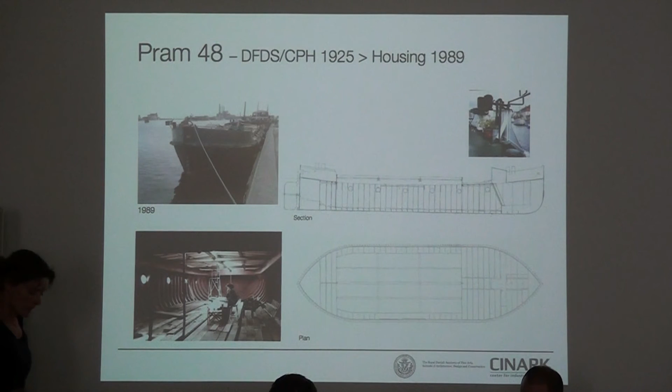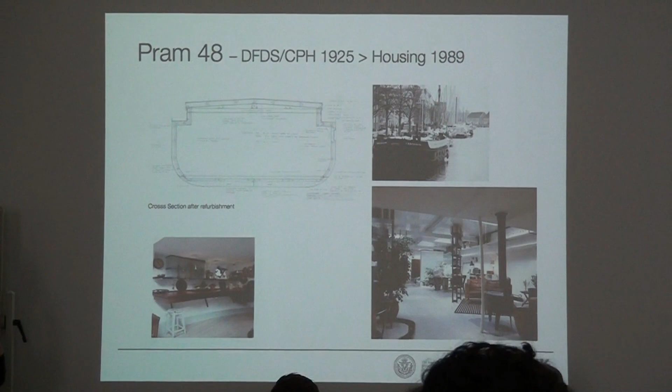This is what it looked like when we took it over, and this is what it looks like now. We live there with three children and a dog, and I'm five minutes from school—sometimes almost too close, in terms of getting off the island, as we usually say.

What's interesting about living like this is that the question of climate change is moving closer every year, with fall and winter storms, and seeing the sea level in Copenhagen's harbor actually rising to very critical levels. Being close to nature while in the center of the city is a great treat, but also a great daily challenge.

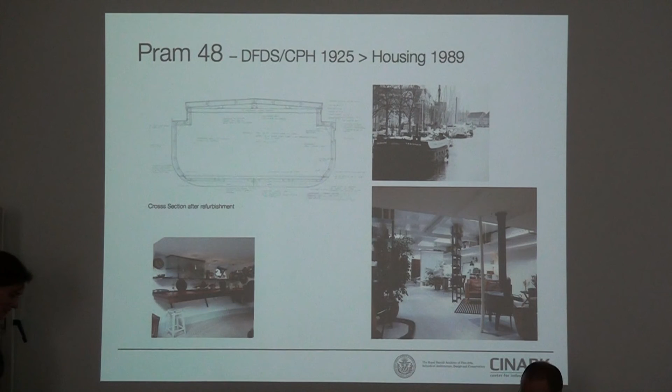This is the KADK, as it's called right now. If I had been here ten years ago, I would probably have called it something like RFDA—the Royal Danish Academy of Fine Arts, School of Architecture.

In 2014 we had a merger with the School of Design and School of Conservation, and became the KADK. We had a new dean, a new governance structure, a professional board, and we were moved from the Ministry of Culture to the Ministry of Education. All these things happened within a year.

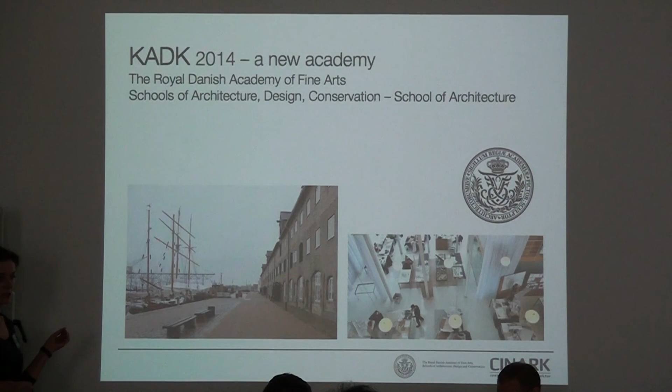It's a very old school—probably the second oldest architectural education in Europe, founded in 1754 by King Frederick V. Those of us who studied and graduated there carry this legacy of history with us. But at the same time it's also a very contemporary school, and it has certainly changed.

In 2014, we also changed the whole structure of the school. Before, we had institutes or departments, but now because we had these two new schools integrated, they wanted to make a couple of shared programs, not with conservation, because that's very special training, but across design and architecture. We have 2 architectural schools in Denmark, one in Copenhagen, one in Aarhus, and before the merger we had 2 schools of design. So now at this moment we have the KADK, which is a conglomerate of educations, a small university, and then the School of Architecture and the School of Design still.

What happened was that we got a number of new programs. Everyone had to bid in or propose programs both for bachelor's and candidate programs, and this whole landscape of new titles came up. I proposed one which talked about ecology, tectonics, and industrialized architecture. Someone else proposed something about urbanism, ecology, and planning, and then someone found out that the 2 of us should make a program together. So this was just to explain how this whole procedure or process was taken on.

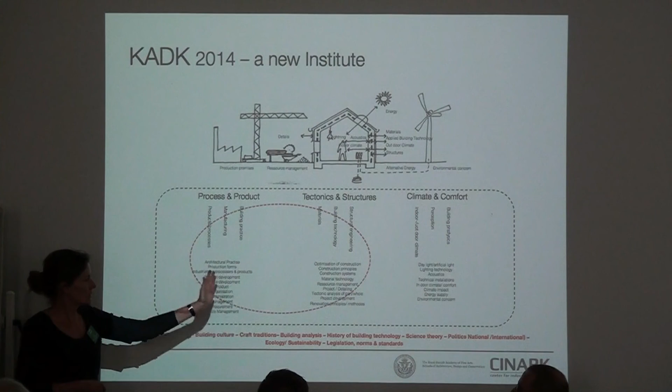But what happened as far as the topics, the climate and comfort people were taken out and moved into the design institute, which was to me a great puzzle. I don't think you can speak about constructions and architecture without talking about building physics, but all these things happened, and it still hasn't really found its proper form.

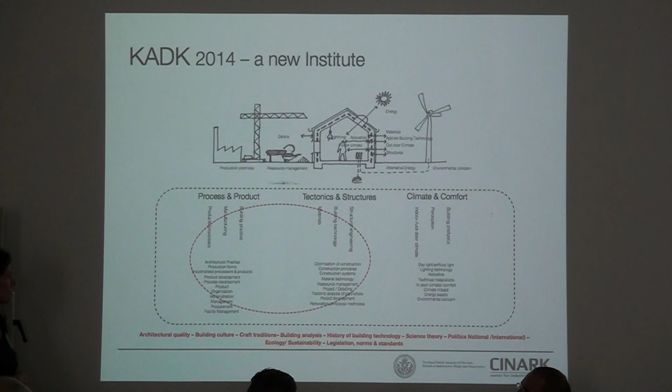But this just came up the week before last. What's happening at this moment is that we have, as you may know, a government mainly supported by the right-wing party in Denmark, and they have a very strict policy in terms of getting people into work, which is reasonable. But at the same time, they are looking at unemployment rates, and among the most unemployed are designers and architects. So we were actually subject to a budget cut of 38%, which was implemented the week before last.

It's 30% of the intake of students and 8% of the total budget. We were just called for a meeting where the dean told us how this was going to be executed, and it also affected the structure of the programs. So these things are happening just these weeks. While I've been sitting here, I've been getting emails saying things like, 'Now we're protesting, can you sign this protest letter?' All these things are happening in the background at this moment.

But at the same time, by putting us into this new managerial reform among the universities in Denmark, we don't have any democratic influence on the decision making at this moment, which is very frustrating from an academic point of view. But so far we survived, we survived this new cutdown. We're still out here, it says in Danish, but we still hold the title. But it says here we have to be developed further, so we are very curious about what that implies.

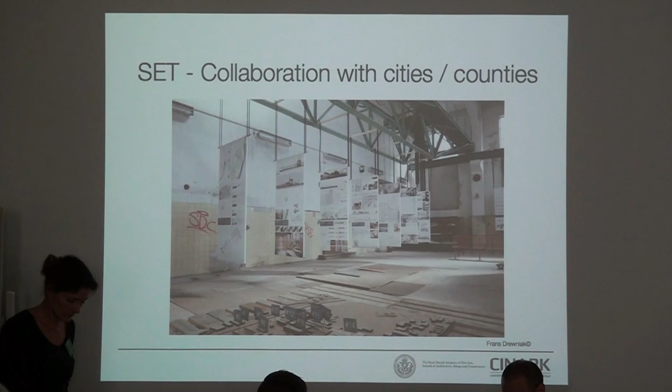But also, as for the program itself, we are collaborating with cities and counties, taking up problems or ideas or politics, trying to push forward and engage the student projects in these collaborations. This is from an exhibition we had last year in a large paper mill, a huge area in the city of Næstved that has closed down, an industrial area where the students worked within that context, and the projects were then exhibited in the mill. There was a whole group of people from the city hall and regular inhabitants of the city who participated.

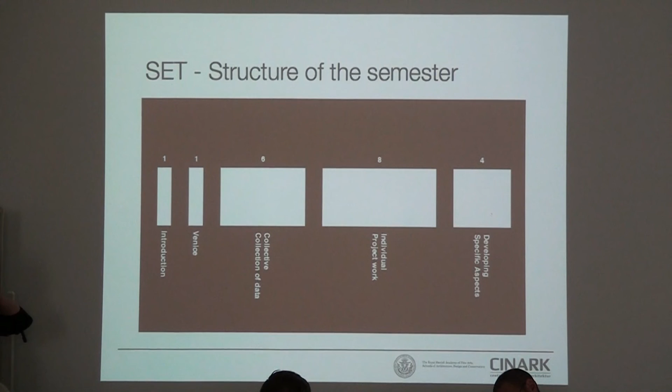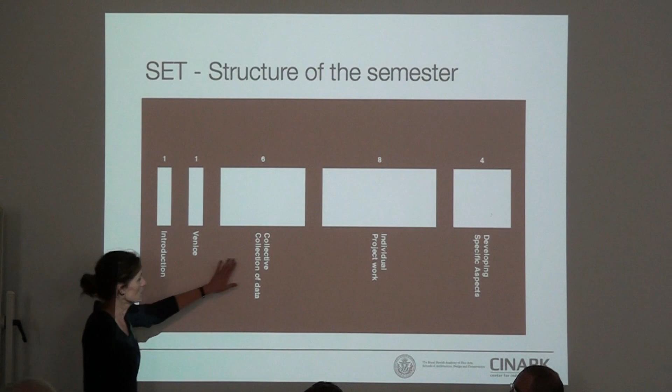This is just to show how the semester has been structured. It's very simple, but we usually have a portfolio week where everyone presents. We also go to Switzerland, but this year, the first year, we went to Venice. Then we have a huge bulk of collective data. We have the students make different sort of registrations, interviews, and whatnot, and then we have this pool of data which everyone can draw upon in their projects. Then they do their individual projects, and from that they take the last 4 weeks to take out a specific aspect they deal with in greater detail.

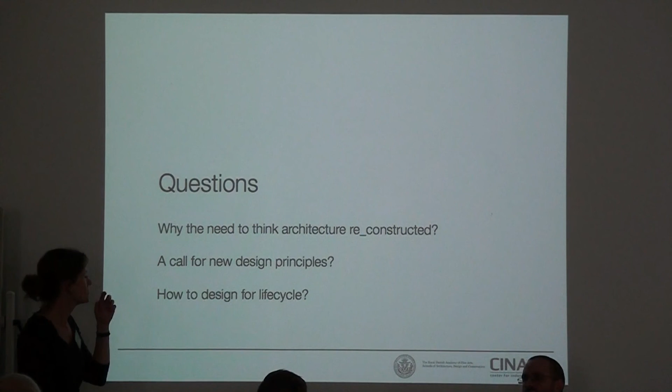As for the things I wanted to talk about, having listened to the other presentations, I think it's important that I situate the examples and the discussion on which we have built our program. These are the questions: why do we need to think architecture reconstructed? I'll try to frame the overall question, which will also summarize some of the points addressed in the former presentations. So this is the big picture of the environmental challenges in the building industry, and how this affects architecture and the education of architects.

And then this call for new design principles. I'll show an example from one of our PhD students, who is actually running an architectural office and also teaching in our program. Finally, some examples from the students on how to design for life cycle, showing how we teach the field of salvage, in this case building materials in construction, and life cycle scenarios in the architectural design phases.

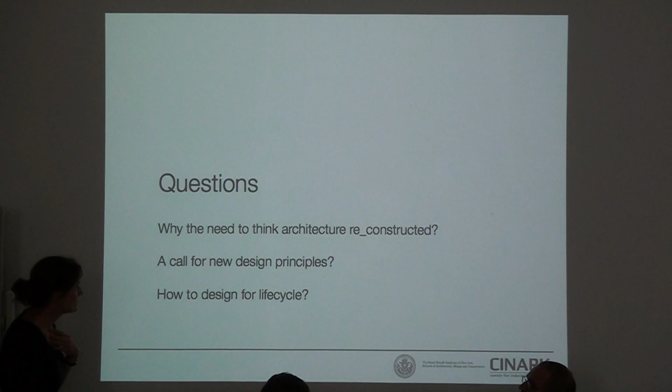I'd like to open with a statement addressing tectonic thinking, which is very much what I have been dealing with throughout my academic career, and also address in the teaching. Tectonic thinking is defined as a vital attention towards the nature, the properties, and the application of building materials and the structural principles of construction, and how this attention forms a creative force in building construction through architectural design, enabling us to identify, refine, and direct architectural strategies for sustainable building culture. So this is the basic idea.

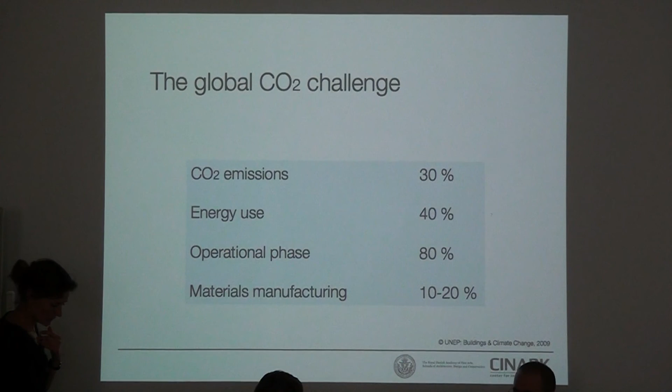This also points at the one-eyed insulation strategy, at least as we have seen it in Denmark. In Europe, the construction and operation of buildings are responsible for 36% of total energy consumption, and the political objective is to reduce energy use by 20% by 2020. In Denmark, they are already considering the fact that they're not able to reach these numbers, so they are now trying to open up the legislation for alternatives, which is, of course, questionable.

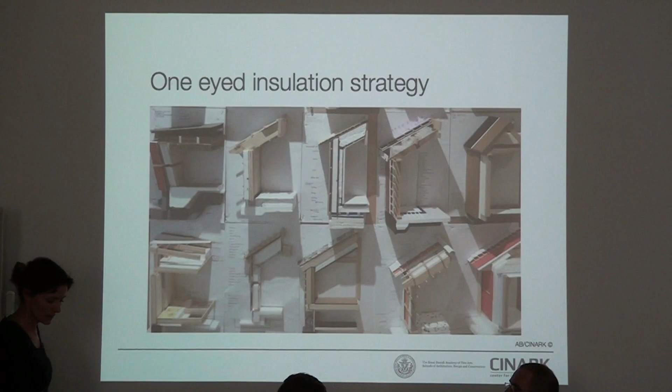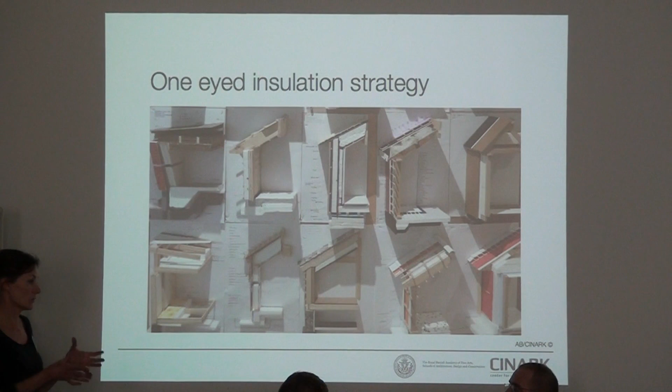Reaching this goal places high demands on the construction industry and existing buildings, and so far actions have focused on reducing energy consumption through increasing insulation standards, asking for airtight constructions, and by integrating green technologies, aiming at energy levels comparable to passive house standards. Presently, we see construction solutions where excessive amounts of insulation material are being used, obstructing good construction solutions and traditional building techniques. As you may know, in Denmark and many northern European countries we have a lot of brick, and these insulation standards really put pressure on what you could say are mineral-based constructions. It also applies to concrete constructions.

Another important aspect to consider when we succeed in minimizing greenhouse gas emissions in our buildings is that the affecting causes shift from operations such as heating and energy to the physical construction. In that sense, the embodied energy of construction materials and building elements becomes very important, not only for reducing greenhouse gas emissions when designing new buildings, but also when we take existing materials and highly finished building components that have gone through a lot of processing into account for further use or recycling.

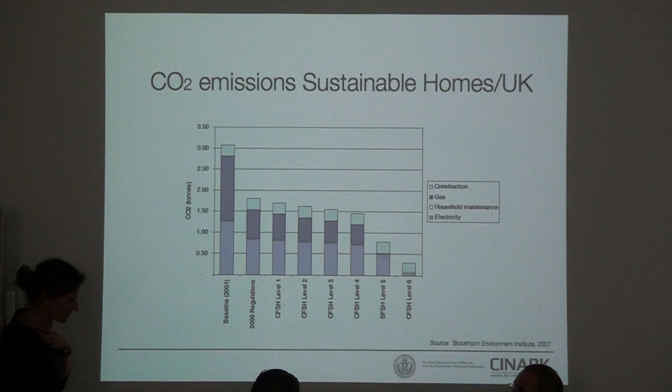So in 2005, the European Commission proposed a strategy on the sustainable use of natural resources in Europe. This strategy focused on reducing the environmental impact of production and aims to examine the whole life cycle of our natural resources: how they enter our economy, what products are made from them, and at the end of their useful life, how the various materials and substances return to soil, air, and water. The intention is to point to solutions such as cleaner technologies and environmentally less problematic substitutes, in other words, to avoid resolving one problem while creating another.

The resources strategy is interesting because it offers a broader perspective than the pure energy focus, by including a diverse range of parameters, also defined as life cycle thinking, shown here in relation to building. This may be common sense for most of you, but when we present this to people in the construction industry, they always seem sort of aware, but when you look over their shoulder, you realize they're not there at all, not even close to this way of thinking.

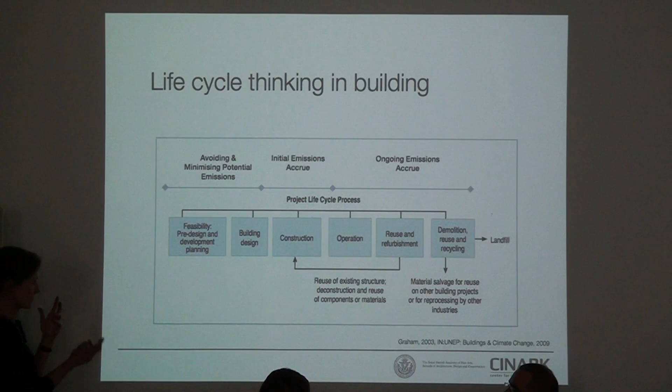But what about waste? This life cycle thinking relates to the question of waste, and the Danish government presented in 2013 a resource strategy named Denmark Without Waste. The strategy describes how Denmark must recycle more waste and reduce waste burning in incinerator plants.

We just saw this huge incinerator plant presented yesterday, designed by BIG in Copenhagen. It has already become a big political issue because some politicians want more waste salvaged or reused, while the company that owns the incinerator plant wants more waste to be burned. So now they're actually considering importing waste in order to keep it running.

The largest part of Denmark's total waste comes from demolished buildings, and in 2013 this waste amounted to 2.6 million tons per year. A total of 87% of construction waste is recycled, primarily being crushed for road fill. However, this sort of recycling is not particularly sustainable, considering the loss of embedded energy or value of the materials and products. Also, harmful substances are released into the environment with risk of pollution.

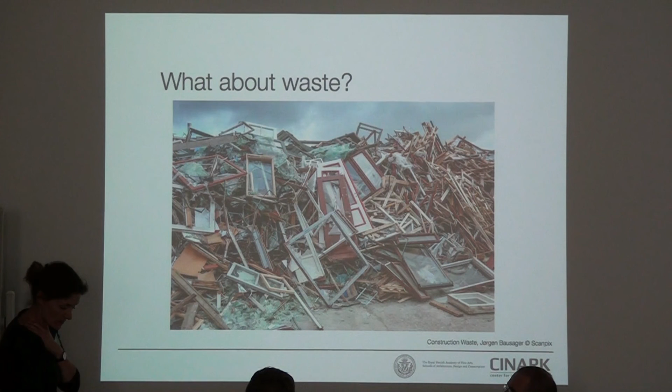A better way of recycling is to reuse materials and elements without substantial processing. It provides a better energy balance, and historical building elements can be salvaged and included in a sort of cultural cycle.

In regard to the various questions raised, it's important to note that most prior definitions of tectonics, or the making of buildings, responded to profoundly different and much less complex circumstances compared to the building industry we know today, both in terms of materials used, craft traditions, and the evolutionary stage of construction techniques. Present-day construction involves a multitude of natural, artificial, and composite materials, highly complex construction designs, and industrialized building supply chains. Today, architectural design phases are closely linked to industrialized manufacturing and the rationality of the construction phases.

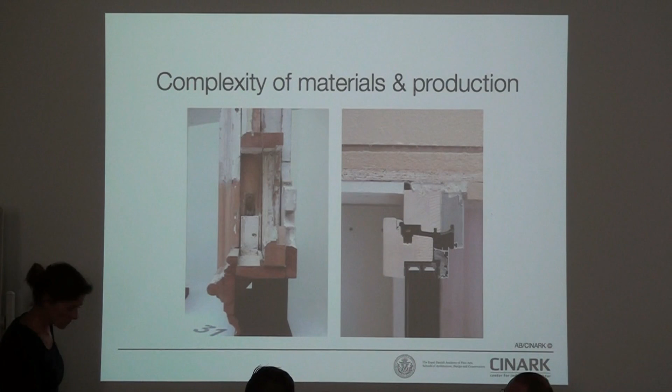As for cultural diversity, it also demands data and control over local climate conditions. Performance of buildings, physics, and management of energy consumption are equally influencing the evolutionary course of the construction industry through unification of building standards and regulations. Today, the construction industry has developed into a paradox of autonomous but interdependent systems, largely ruled by global trends and economies. Within this context, regional cultural identities and holistic approaches to construction as part of architectural design are difficult to maintain, and in worst case scenarios it results in careless collage architecture that no longer depends on local materials, craft traditions, or cultural values.

So this points towards what we call an ecology of tectonics. In view of the diverse character of environmental challenges, the CO2 discourse seems critical as it does not suggest a comprehensive or ecological perspective, despite the many good intentions and measurable effects linked to reducing fossil energy consumption. This environmentally friendly action happens to have adverse implications for architectural design. How do we use material resources, and how can architectural design respond to a larger degree of complexity that comprises a cultural or ethical dimension in construction?

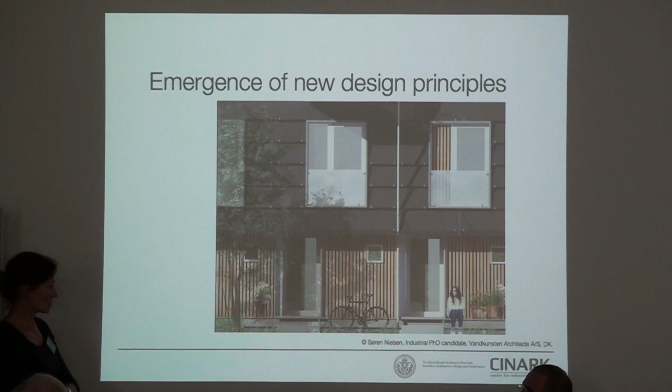Søren Nielsen is a partner of the Danish architectural company Vandkunsten Architects, and has been doing his PhD for three years. He hasn't finished his dissertation yet, unfortunately, but has been writing several articles and also made demonstration projects.

He explains that in these technical diagrams, which he has been developing across a number of projects within the firm, he has been analyzing how the resource flow has been and how the construction is actually situated. In technical diagrams, a building, its parts and details can be dissolved into a number of separate variables that hold general relevance for all similar operations. The diagram documents programmatic results, but reveals nothing about the tectonic articulation.

What he has also found out, which has also been stated by the company Pure Timberlake, who deal with similar issues, is that the procedure in which you design and how materials and structures are constructed is fairly different from when you actually have to dismantle it.

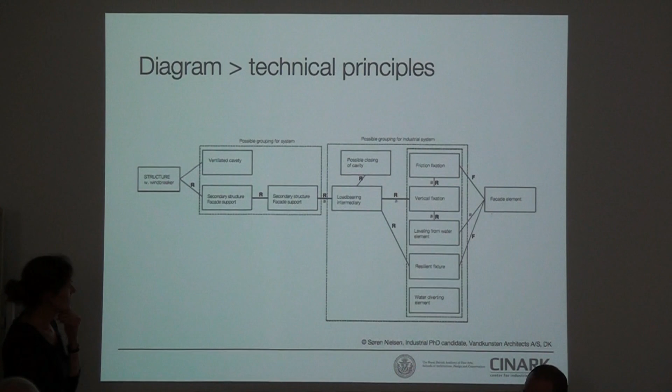But this technical diagram is linked to this tectonic alphabet, as he calls it. So these are two different representations, or articulations, of the same problem, or the same aspect, in construction.

As for the tectonic articulations, they can be identified as form-generating phenomena, which can be shown in pictograms. The very link between the technical principles and the tectonic articulation remains situated in the material evidence of the actual building. The pictograms have developed into a whole alphabet that can be organized in groups of tectonic typologies, or generic families. This has also shown very helpful when we're trying to translate some of these more technical principles to the students, because it's a different mindset, a different way to look upon the same construction principle.

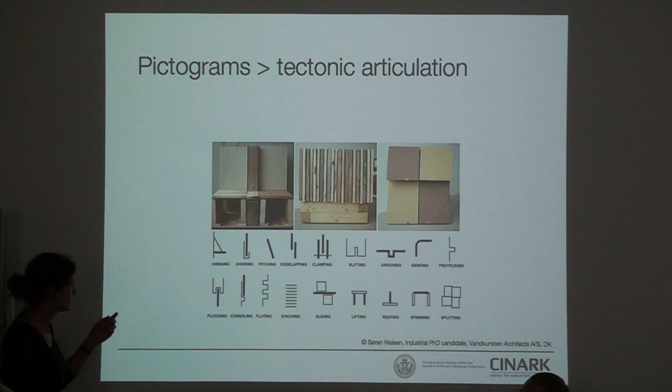He has also used this in a specific analysis of this project, both for analyzing existing buildings they had designed, but also for defining or expanding the program in competition briefs, and it has shown in both cases to be very helpful. This is the way he defines the different levels of the similar design features of the construction.

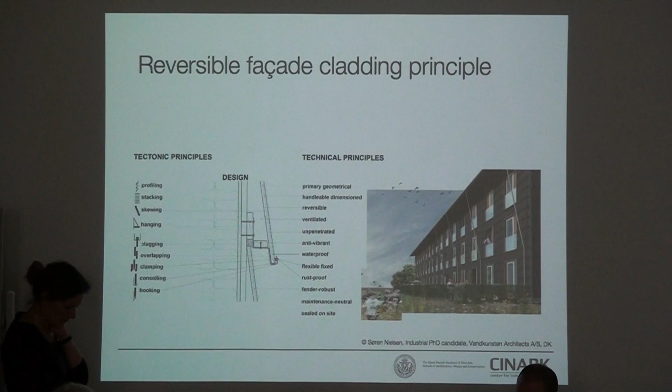As for teaching sustainability within the candidate program, we have at this moment two different levels or main initiatives. The first was, as I explained before, the theme of the year, connected to these publications on metabolism and strategies for reconstruction.

The second part is what we call a research practice linked to research projects within the research center, where we as researchers have a regular research project with a number of companies and other institutions, including the Technical University in Denmark. We also include students, where they are part of an internship in selected companies who work within the similar field, and the projects are being disseminated within these publications that I also brought here today.

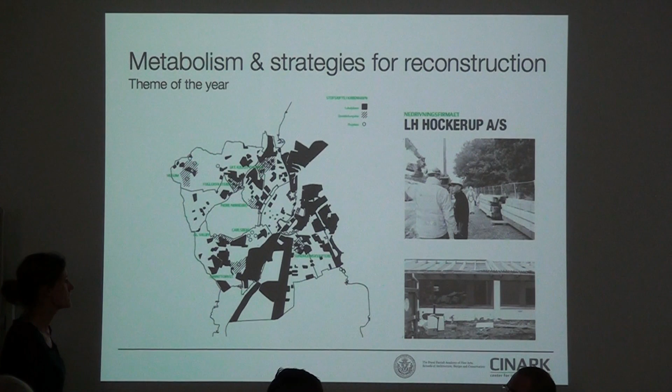This is an example of the yearly theme, where we had students first make a thorough analysis together with a number of demolition companies, identifying quarters of Greater Copenhagen where there was a great change of resources, or a high metabolism in terms of construction materials. They mapped and pointed out specific areas where they wanted to work. This was the initial engagement, and the students worked for a week and a half with the demolition companies on site, also interviewing them.

As part of this initial task, they made schematic registrations of the different materials, for example the exterior walls, the different materials, and the amounts of the different fractions and so forth. They also conducted historical studies into that particular building technology or construction technique as a parallel study.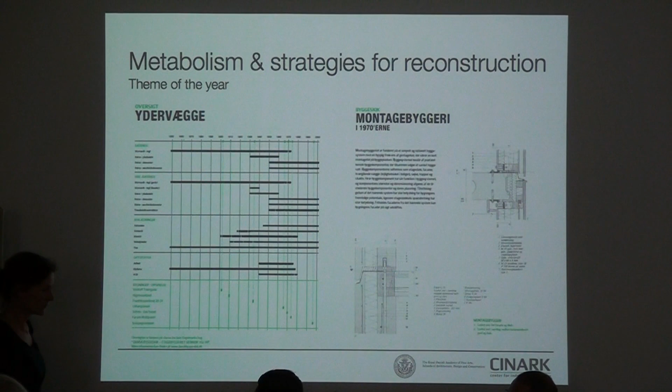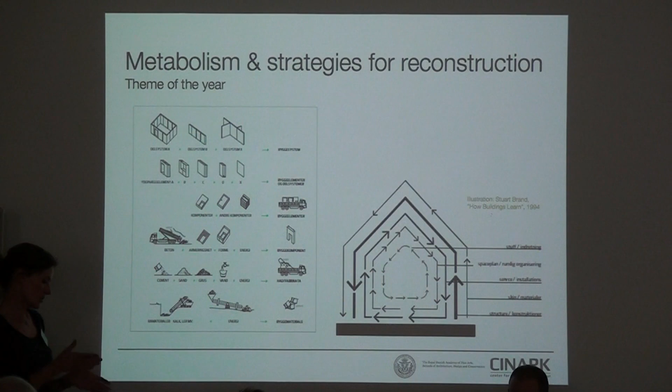Then they worked on this overall amount of data, developing different hierarchies of to what level the building component was processed, discussing it in terms of literature and different theories, among others Stuart Brand's How Buildings Learn, and his theory about shearing layers, where you have to consider which part of the construction has to be taken out in order to maintain another part. It's a much more complex way of thinking about the different layers of construction, rather than just looking at a section which seems easy to grasp; when you include his theories it becomes much more dynamic and complex.

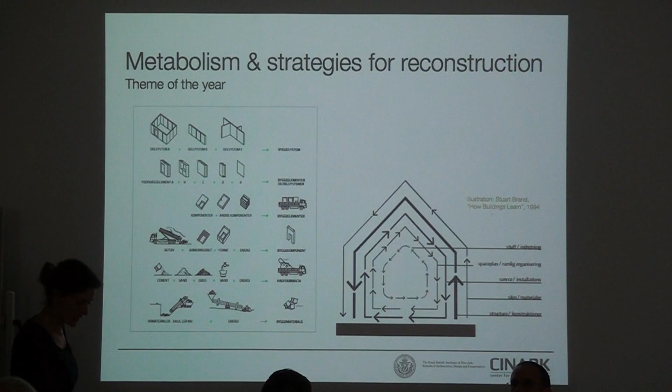This is some of the outcomes. We encourage students to work in groups, though we cannot force them, and now most of them work in small collaborative groups of usually 2 or 3 people. This group worked on the old Carlsberg Brewery in the center of Copenhagen, which is now being totally transformed.

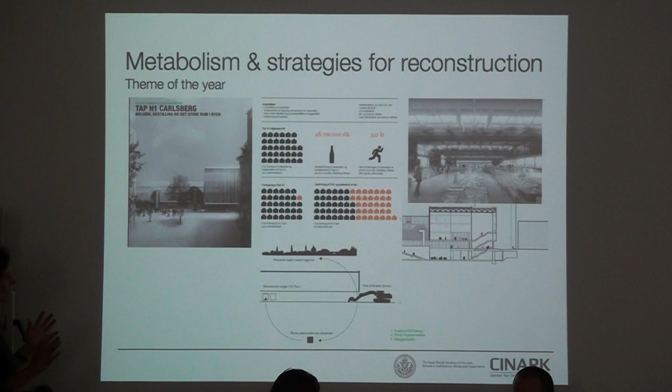There are many very beautiful buildings, and some of them are luckily listed, but many from the 80s and late 70s haven't been listed. This is one of them: the big bottling facility where they used to bottle the beer, from the early 80s. A very nice building made of fantastic materials and a beautiful structure, one of the largest free-span structures in the center of Copenhagen, and it's actually planned to be taken down.

But the students made this LCA analysis. At that point in this particular project, we had a two-week parallel course with engineering students from DTU, who helped our students, or worked together with them, on the LCA analysis.

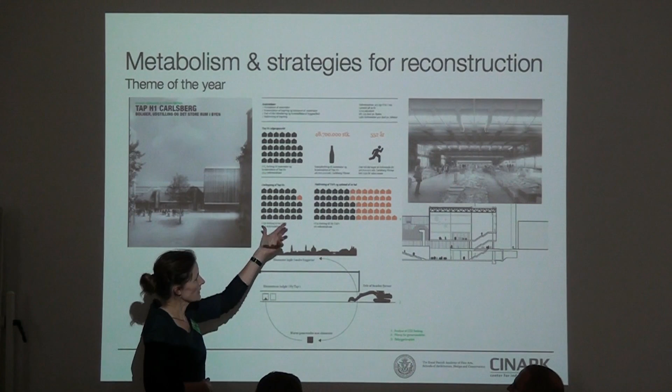So what the students proposed was to keep the structure and add different new programs, using much of the structure as it is but for new purposes: a covered marketplace, student housing on the side, and exhibition spaces. This gave a pretty feasible result from the project.

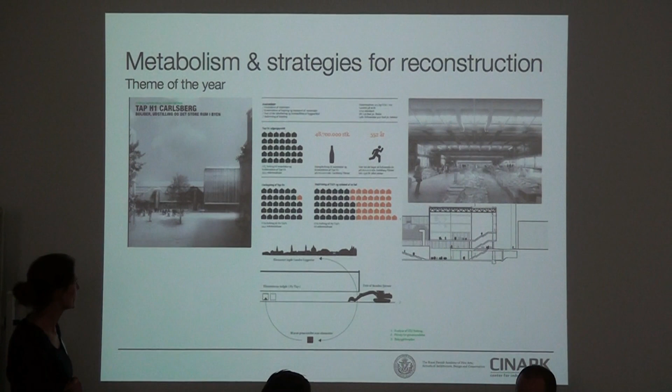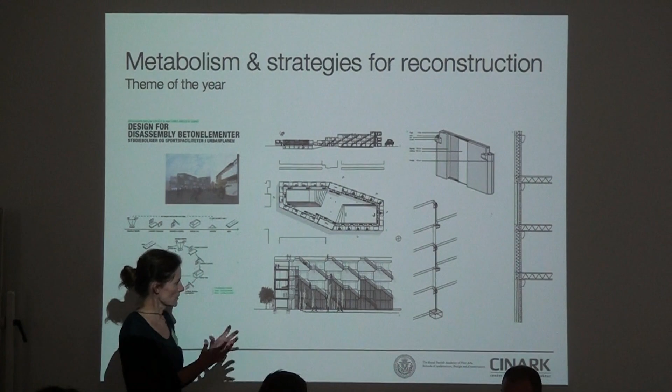This is another project from another group of students, who worked in an urban area of social housing with prefabricated concrete element structures from the 70s that are very difficult to refurbish and reuse. From that point, they developed an alternative concrete element that could be disassembled. They spent a lot of time working on the joints between the elements, how they could be assembled and disassembled, and also configured into different sizes, in order to add flexibility to this structural system.

So by studying existing concrete prefab structures, they developed this new building system.

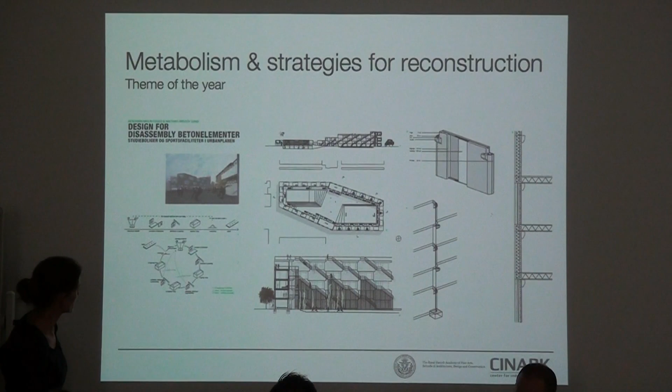This is what we call the research intern project, where we had students affiliated with two different companies, Vandkunsten, which I just mentioned, and Lendager Group Architects. What is particular about these two companies is that they both are very much engaged in projects based on ideas about circular economy, but from different perspectives.

Whereas Vandkunsten is much into developing design principles, as I explained before, Lendager Architects are more into working together with industry on feasible market or business models for recycling materials. In this case, they take concrete waste, crush it, and re-implement it into new concrete structures.

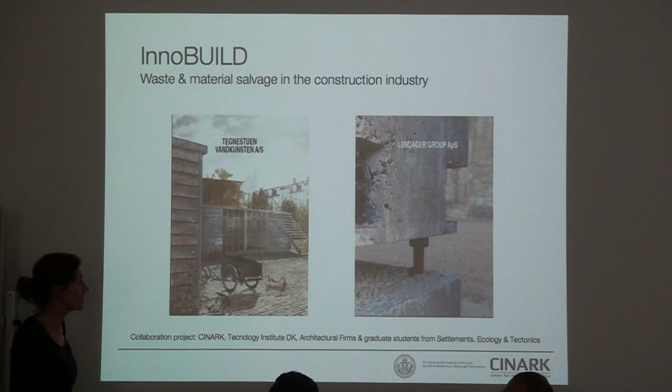This is from one of the Vandkunsten projects, which they did together with a group of Nordic universities and other companies. It's called Nordic Built, where they look into component reuse and prototyping, and they have come up with a fairly large catalog of different ideas.

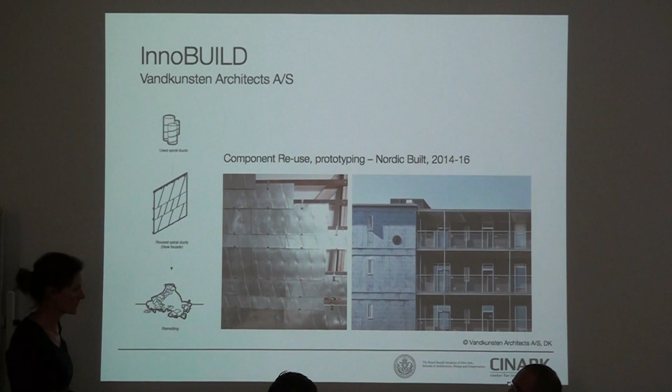In this case, they are using these spiral ducts, flattening them out and reusing them for cladding. This is a rendering from one of their existing houses where they're testing it, but they made a whole series of different prototypes. This is the students' work.

They were working with the company, inside the company, for 3 months, not working on the company's projects, but developing their own project, leaning or borrowing ideas and theories from this particular design principle, and developed this prefabricated system for local recycling centers in Copenhagen.

What was particular about this group of three girls was that they were communicating with the city of Copenhagen and the Office of Waste Handling, and they actually came up with a proper project which could actually be developed further if the city of Copenhagen wanted to go further with it.

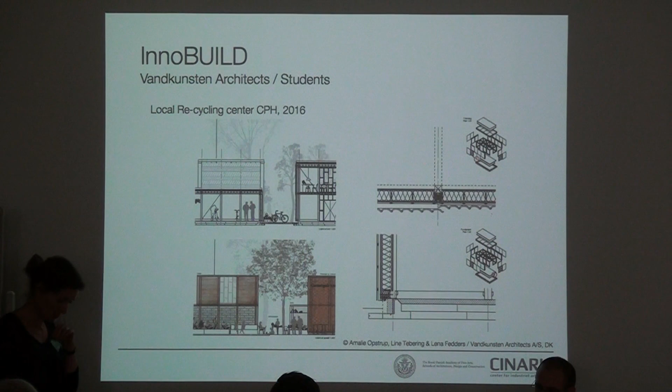This is the other project of Lendager Architects, who have been very much into this whole business model of how to recycle concrete, not only for road fill, but also for new structures. Together with this self-storage company, Pelikan Self Storage, they have developed a building system which they're now testing in the center of Copenhagen.

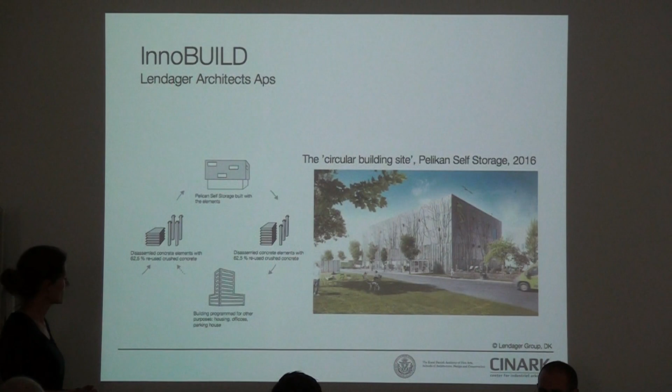As for the students, they got involved more directly in that particular project and developed these new concrete columns that can be dismantled after use. There's a big thing about handling because they're huge structures or huge building elements. They're not easy to move around.

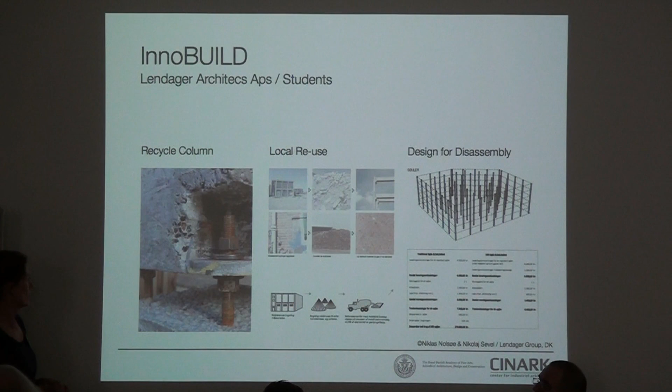What's important is that you can actually take them down and use them again, in this case for this self-storage system. They did thorough calculations and comparisons between regular construction systems and these particular new structures, though you can't see that here.

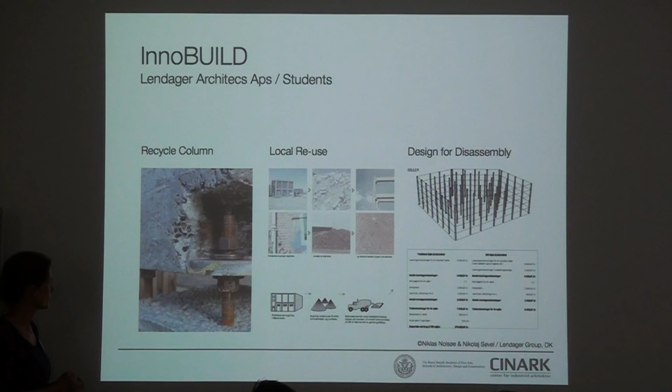This is the concluding statement, which is maybe a little bit spiritual or ideological, whatever—I don't mind moralizing a little bit. But to think architecture design for reconstruction includes an ecology of tectonics that brings a new ethical dimension into architectural design and the construction industry.

And it offers a series of holistic life cycle strategies that open up for alternative markets and a new role of the architect. It sparks ideas for new architectural design principles based on structured and transparent methodologies to be shared across disciplines.

I think from the tectonic point of view, which I have very much engaged with, I do believe that coming from a different perspective than the urban perspective we listened to yesterday, there are similar, I should say, overall engaging dimensions that can have just as important and direct effect into a larger perspective and a global discussion.

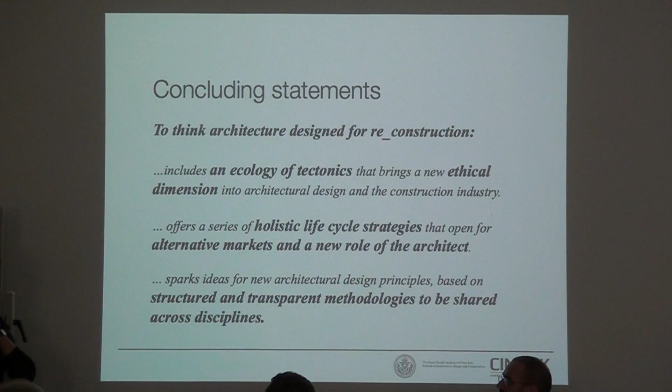From a student perspective it's very, very interesting because you can come very quickly into a direct dialogue with industry, architectural companies and colleagues and make proper experiments and so forth. So in that sense I find the tectonic discourse very productive and very inspiring.

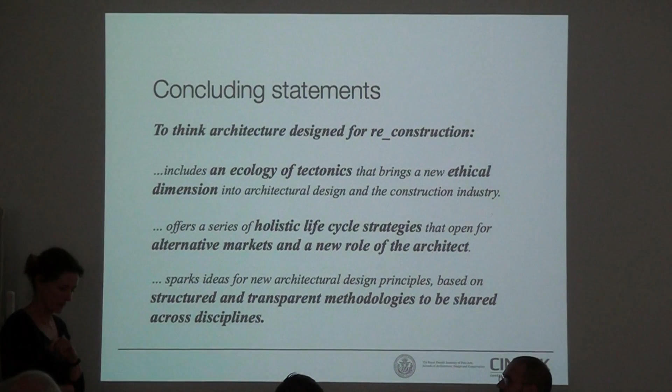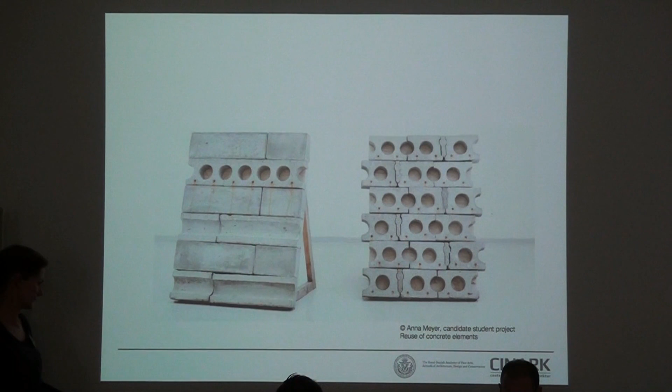This is one of the final examples, of one of our graduate students who cut up concrete elements and made them into these propositions for slabs—what's it called—pavers, paving slabs. Yeah, this is it.